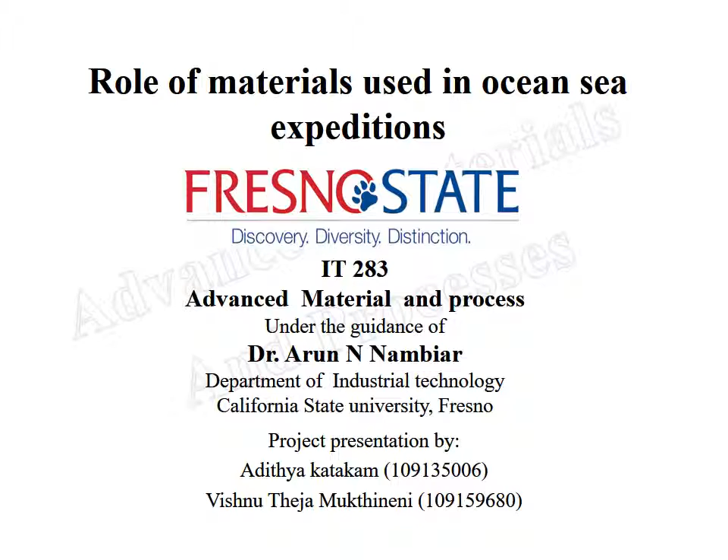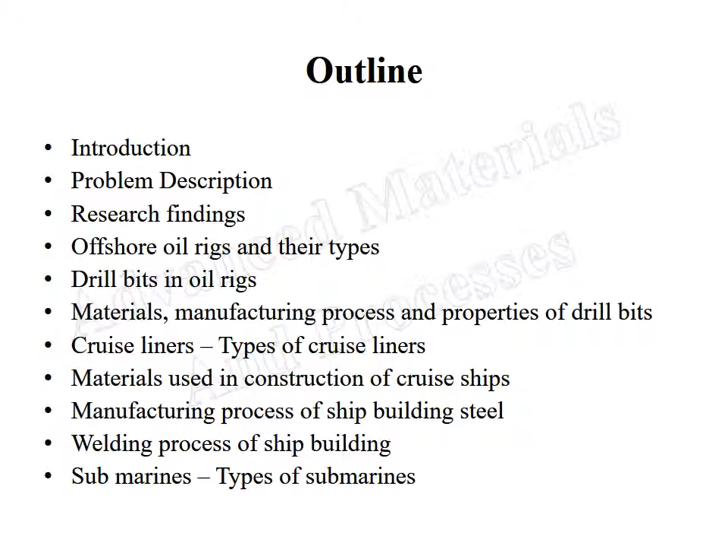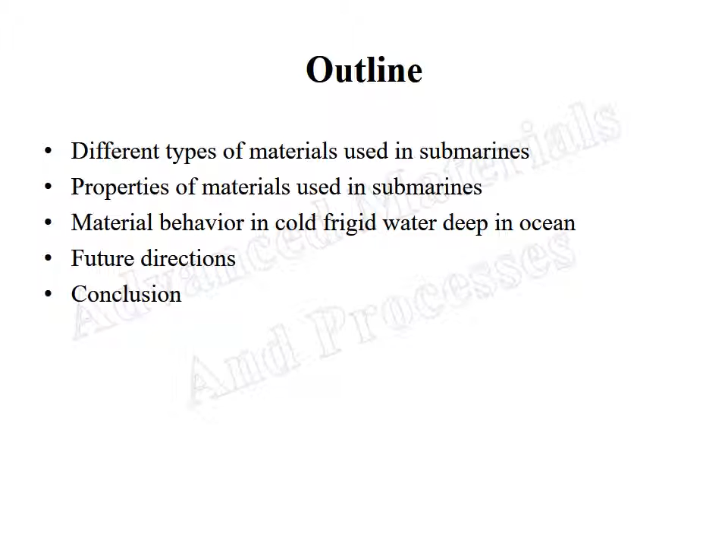This is the outline for our project, under the guidance of Dr. Arun N. Nambiar. In this outline, we discussed introduction, problem description, research findings, offshore oil rigs and their types, drill bits in oil rigs, materials, manufacturing process and properties of drill bits, and the later stages will be discussed by my groupmate Vishnu Theja Mukthineni. We also cover future directions and conclusions about what materials would be used to get the proper yield from ocean sea expeditions.

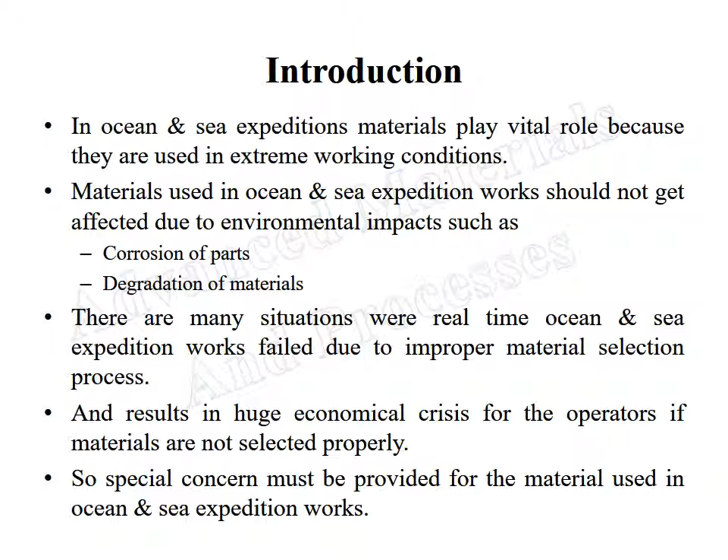Introduction. In ocean sea expeditions, materials play a vital role because they are supposed to work in extreme working conditions. So materials used in ocean sea expeditions should not get affected due to environmental impacts such as corrosion of parts and degradation of materials. There are many situations where real-time ocean and sea expedition works fail due to improper material selection process, and because of this, many operators of oil rigs have faced huge economic crisis. So special concern must be provided for the material selection process in ocean sea expedition work.

Problem description. The materials used in ocean and sea expedition works are expected to work in water bodies throughout their lifetime. Therefore, the materials used to manufacture the tools and machineries of ocean sea expeditions must have unique properties such as low thermal expansion coefficient, high corrosion resistance, excellent toughness, and high working hardness. Materials without the above stated properties will lead to failure. So this trending problem in ocean sea expeditions must be addressed by using modern technological developments in the material selection process.

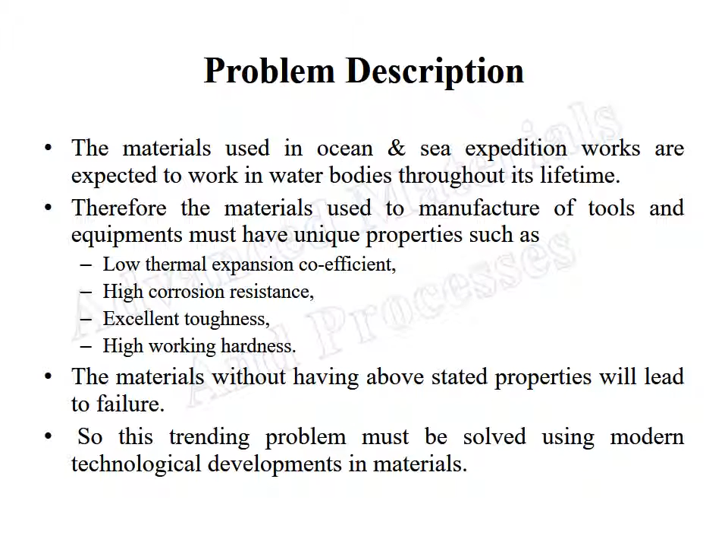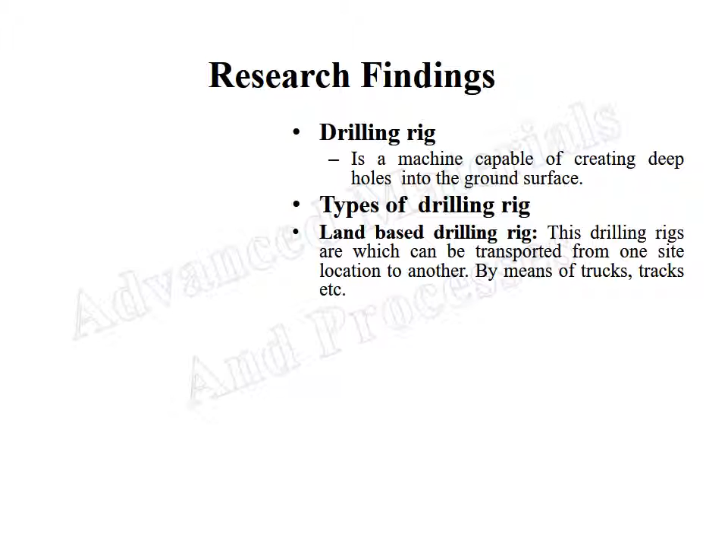Research findings. Drilling rig is a machine capable of creating deep holes in the ground surface. There are two types of drilling rigs available. One is land-based drilling rig, which can be transported from one site location to another by means of trucks, tracks, etc.

The other one is marine-based drilling rig. In these marine-based drilling rigs, there are two types available: onshore oil rig and offshore oil rig. In onshore oil rigs, these are settled on the surface of land where natural oil deposits are available, and the oil is extracted using a sucker rod pump mechanism. Whereas in offshore oil rig, they are settled on the surface of ocean and sea floor. As our topic is related to materials used in ocean sea expeditions, we are more focused on offshore oil rigs.

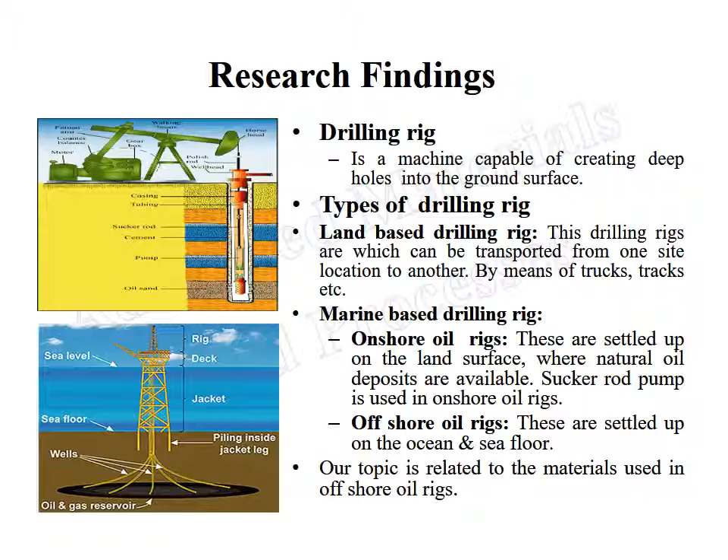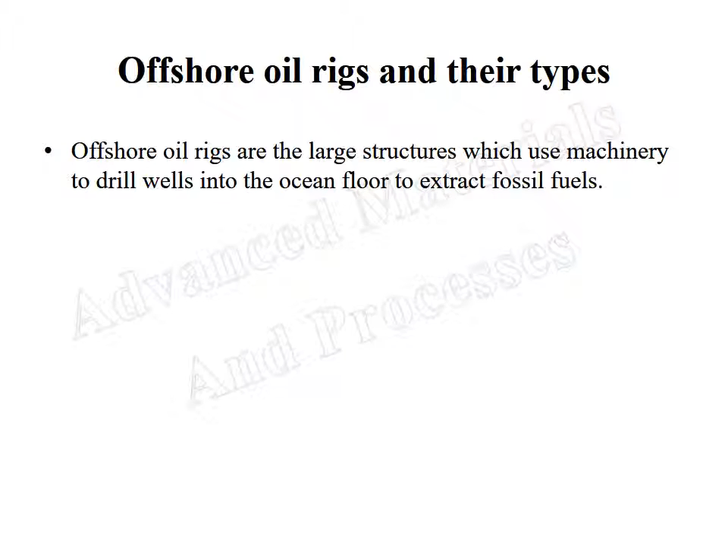Offshore oil rigs and their types. Here we discuss different types of offshore oil rigs available and the materials used for manufacturing them. The offshore oil rigs are large structures which use machinery to drill wells into the ocean sea floor to extract fossil fuels from the ocean seabed.

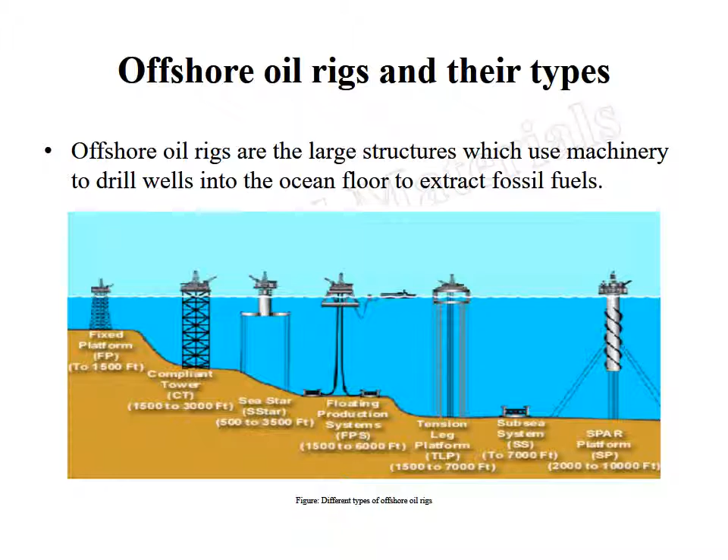Offshore oil rigs and their types. There are different types of offshore oil rigs available. The first one is fixed platform. This platform is operated at depths of up to 1500 feet. Materials such as steel bars and concrete are used to construct fixed platform offshore oil rigs. The base of the offshore oil rig is fixed to the ground using steel frames, making it so rigid that it will not get affected by winds and tides.

The next form of offshore oil rig is compliant towers. This oil rig is used when the ocean depth is 1500 to 3000 feet. This platform is similar to the construction of fixed platform but has a more improved structural design with narrow frame construction.

The next one is sea star platform. This operates at ocean depths of 500 to 3500 feet. The structural design of this platform is different, having tension legs made out of steel ropes to support the platform, with grounding made using anchors.

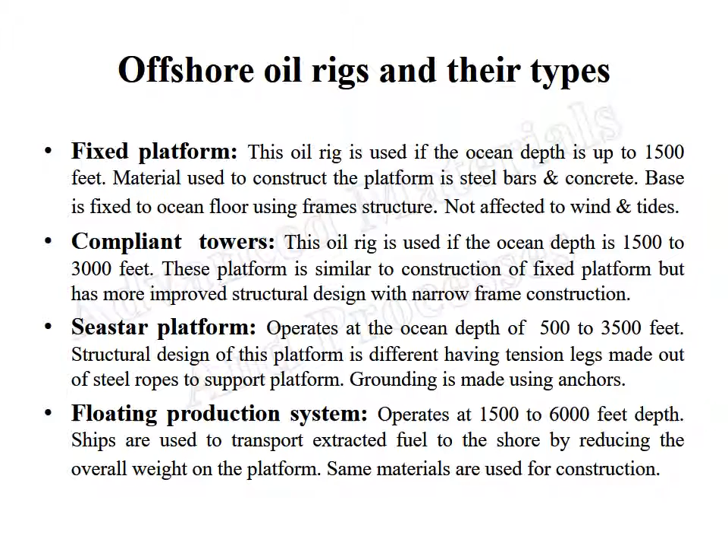Floating production system. This operates at depths of 1500 to 6000 feet. Ships are used to transport extracted fuels to the shore, reducing the overall weight on the platform. The same materials are used for the construction of this oil rig. Offshore oil rig and the types, continued.

Tension leg platforms operate at depths of 1500 to 7000 feet. Long flexible tension ropes are used to attach the platform to the ocean floor. These ropes are made using duplex steel, which has better corrosion resistance and crack resistance.

The other offshore oil rig is the subsea system, which operates at a range of 7000 feet. This system is completely set up on the ocean bed. It can only extract oil from the ocean bed but doesn't have the ability to drill holes; it is programmed only to extract the fuel.

Spar platforms have the highest operating range of 2000 to 10,000 feet. A large cylindrical structure is made to support the platform, and cables and chains are used for fastening purposes.

From our sources we found that Perdido is the largest oil rig in the world, and it was constructed according to the spar platform structure. All these platforms are resistant to hurricanes and ocean floor movements due to improvements in materials used. Platform materials must have the capability to withstand large weight and resist the impacts of tides.

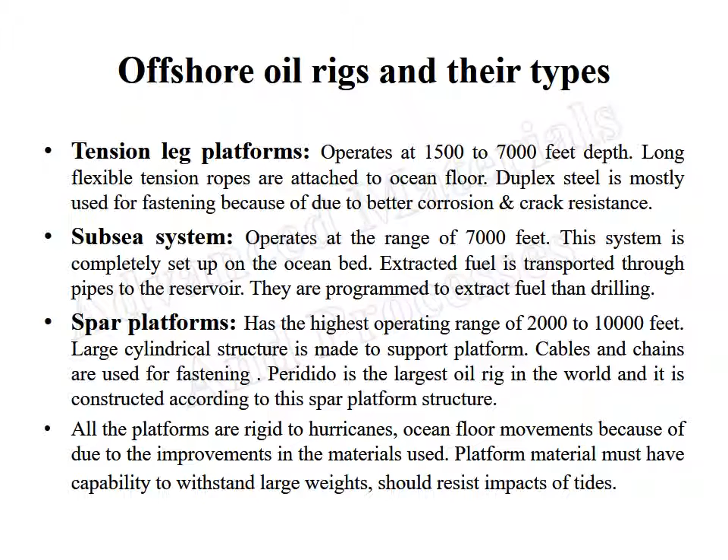Drill bits in oil rigs: there are three types of drill bits available. This figure shows the three types. The first is roller cutter bits, which is divided into two types. These can crush rocks very efficiently without any wear on the tool.

One form of roller cutter bits is steel insert bits, which are used for soft excavation works and have great penetration. The other is carbide insert bits, used for hard surfaces, and they have small protrusions on them.

The other drill bit is long tooth milled bits. They are very efficient at drilling operations due to their long teeth shape and can work in chalk and cemented sands.

Fixed cutter bits use polycrystalline diamond compact cutters to shear rock with a continuous scraping motion. These bits are about 1/8 inch thick and about half to 1 inch in diameter. Diamond is also used as a bit material along with thermally stable polycrystalline material.

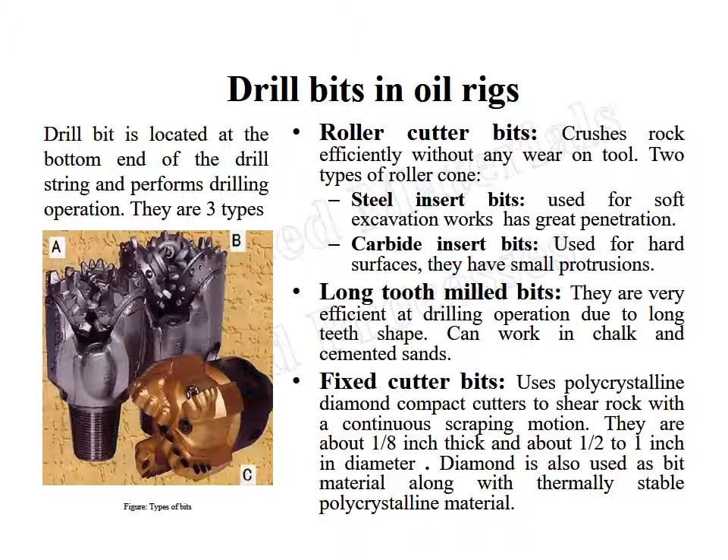We also discussed materials, manufacturing process, and properties of drill bits. Diamond is the hardest material known to man. In these bits, diamond grains are embedded into tungsten carbide blades.

The diamond used is selected according to industry specified grades. The diamond used for drill bits is 10 times harder than steel, 10 times more resistant than tungsten carbide, and 20 times stronger than granite.

To explain the manufacturing process of diamond: raw materials like graphite and cobalt are stacked in small cans and pressed to 2 million psi, followed by heating to 2732 degrees Fahrenheit for 5 minutes. This heating process creates small crystals of synthetic diamond that bond together to become polycrystalline diamond compact, also known as PDC compact structures.

The properties of synthetic diamonds are also discussed. Diamonds have high thermal conductivity, which helps flow heat from the tool to other parts of the tool. Another property is low thermal expansion coefficient. Because of this low thermal expansion coefficient, the tool will not deform and stays in its proper form.

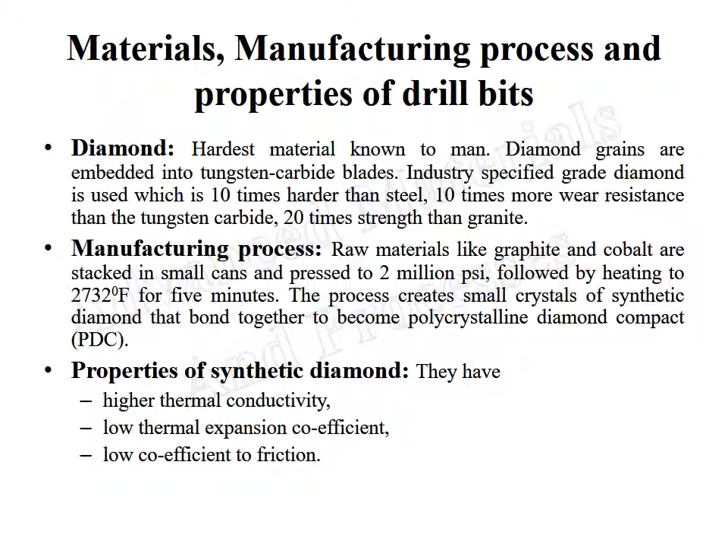Another property is low coefficient of friction. The diamond has a good coefficient of friction, so the parts on the tool will not get worn out during operation. We also discussed the manufacturing process and properties of tungsten carbide.

Tungsten carbide is the hardest material close to diamond. It's a kind of steel comprised of tungsten carbide and cobalt, where cobalt is used as a binder and improves shock resistance. It has a tensile strength of 100,000 to 500,000 psi and Brinell hardness of 2570.

In tungsten carbide tools, they are stronger and have longer life compared to other hardened steels. We also discussed the manufacturing process of tungsten carbide. This material generally starts as powder, and a small amount of wax is added to the mix of powder. The wax holds the material together so that it can be molded.

The mix is then placed in a dewaxing furnace overnight. When removed from the furnace, it appears like chalk in solid form. As a result, the output material obtained has high strength, toughness, and high hardness.

We also discussed the properties of tungsten carbide. The properties include high compressive strength. Because of this high compressive strength, the tools will not break during operation.

The tungsten carbide has a higher melting point which helps to operate the tool at very high temperatures so that the tool will not get deformed due to temperature impacts. The other form of property is high modulus of elasticity.

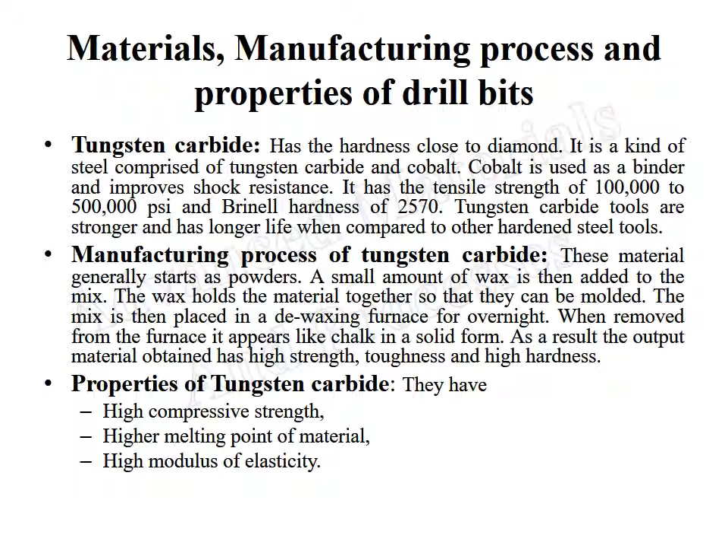Cruise liners. Cruise ships are passenger ships used in pleasure trips and vacations that are usually large and can accommodate thousands of people on board, depending upon the size of the ship. Most ships have small rooms, so many may not want to spend more time in there as the rooms are less expensive than others. The rooms which have extra space are more expensive and have more facilities in it.

It is clear that on a voyage a ship needs many types of materials and different components. Moreover, at the time of ship construction, it may need different types of metal alloys and different techniques in the construction.

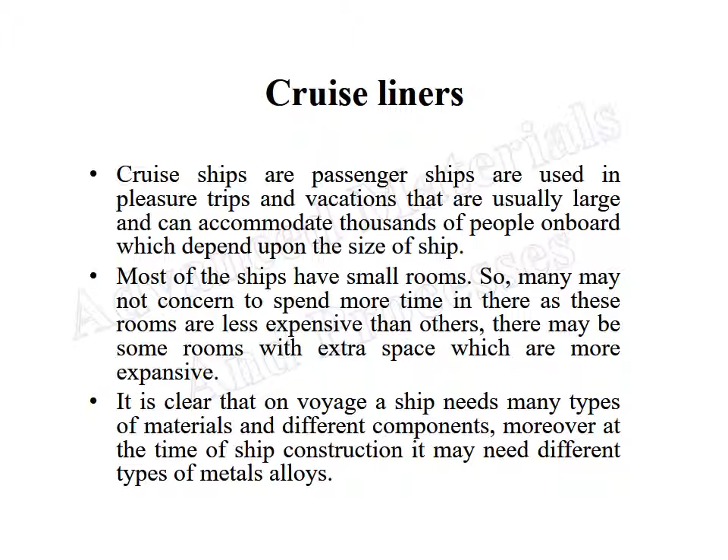Types of cruise ships: Mainstream cruise ships. These types of ships are quite common as they are marketed to fulfill the needs of the majority of passengers with maximum resort features.

Mega cruise ships. These ships can carry about 4,000 to 5,000 persons on board, and they are larger and sophisticated with maximum facilities.

Ocean cruise liners. These are constructed in such a way as to withstand harsh ocean conditions while on long voyages. They have high standards of construction.

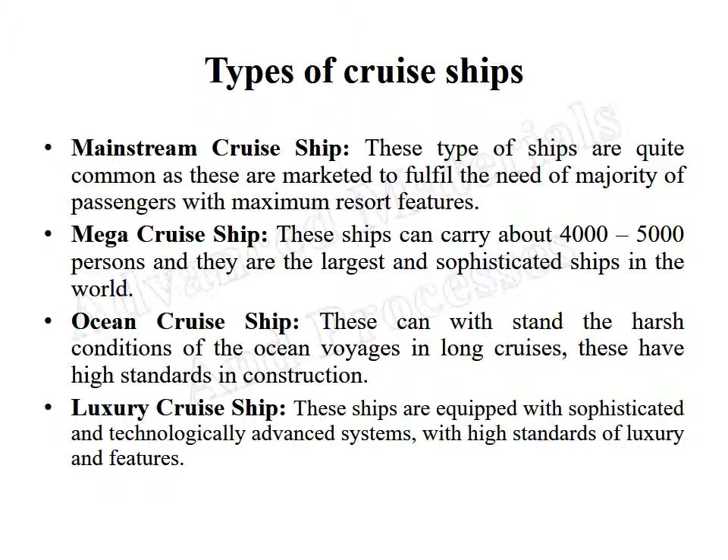Luxury cruise liners. These ships are equipped with sophisticated and technologically advanced systems and with high standards of luxury and features.

Small cruise ships. These ships carry a few hundred people on board, offering a more intimate and relaxing experience in a short voyage. Adventure cruise ships.

These are used for individual visits to remote places. They are equipped with advanced technology and several service arrangements required for the voyage.

Expedition cruise ships. These are ships used in expeditions in search of research findings in critical harsh conditions which are remote destinations. These are also called icebreaker vessels.

River cruise ships. These can't carry more than a few hundred people. These are designed to navigate rivers and inland waterways.

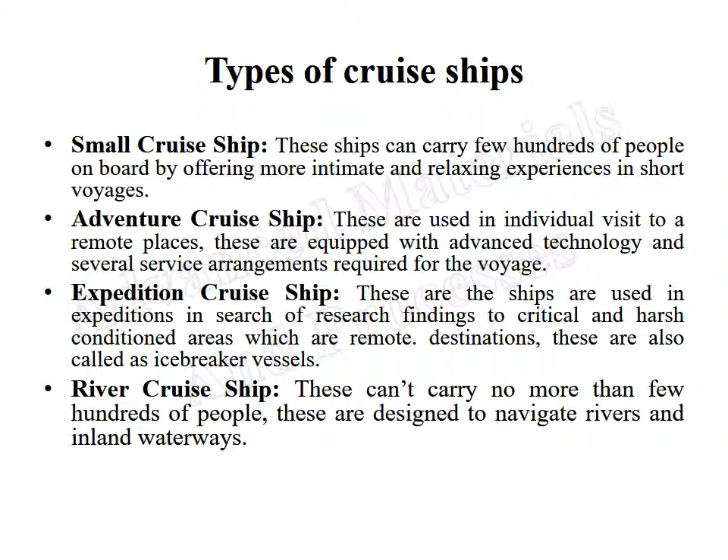Materials used in construction of cruise ships. The materials used in construction of ships should have properties of toughness, ductility, malleability, and corrosion resistance, which are essential for sea voyages.

The most important material of all is steel, which should be heavy metal sheets and plates with a good combination of different properties of alloys. The steel used in construction undergoes different thermal treatments which reduce the alloying materials and give strength.

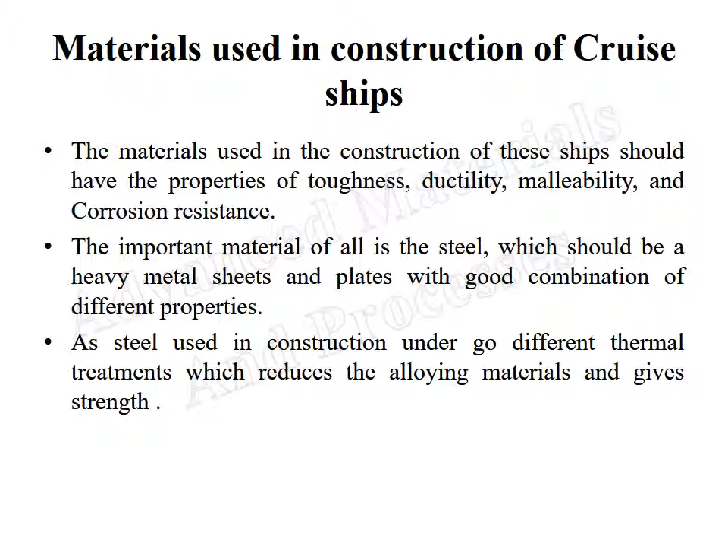Paint is one of the most essential work that is to be done after the construction of the ship. It consists of three components: pigment, a vehicle, and a solvent, depending upon the paint that is used.

It helps steel avoid getting corroded from seawater for a long time, and also helps in reducing friction from water while sailing.

A ship is a large structure and cannot be painted frequently, so a spray system is used in order to paint the whole part in multiple layers of painting.

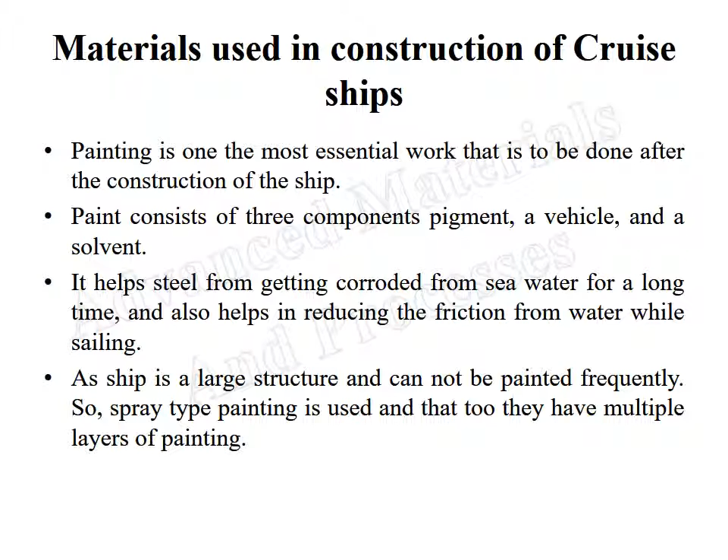Manufacturing process of shipbuilding steel. The first step of the process is melting the raw materials, followed by the forming process where steel is molded into the desired shape, and then heat treatment.

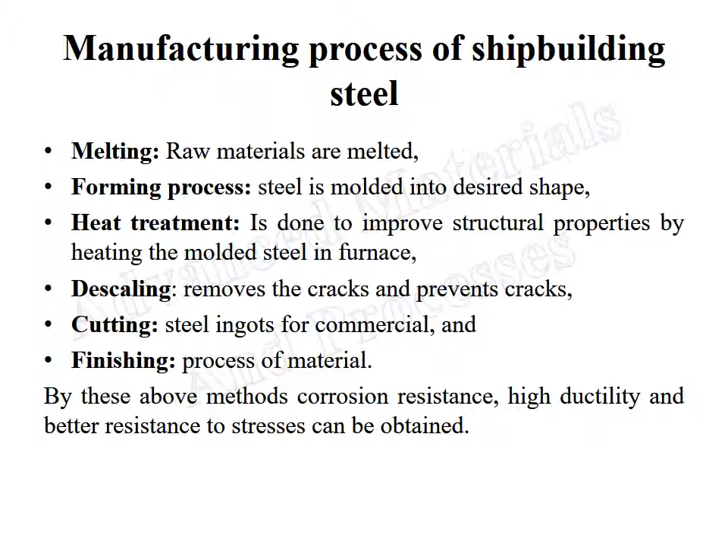This is done to improve structural properties by heating and molding steel in a furnace. Later comes descaling, removing cracks and preventing cracks, then cutting steel ingots for commercial use, and finally the finishing process of the material. By this method, corrosion resistance, high ductility, and better resistance to stress can be obtained.

Welding process in shipbuilding. Welding is the most important process in shipbuilding, as every part is welded using sealing materials to attach at high temperatures.

There are different types of welding techniques used in different parts. Some of the techniques are gas metal arc welding, which uses compressed silicon with copper alloy as a sealing agent. Low carbon steel and aluminum welding is done by lap joint and laser technology.

Submerged arc welding, followed by shielded metal arc welding and gas tungsten welding. These types of welding are used at different parts of the construction in order to join heavy sheets and small instruments to the ship's mainframe.

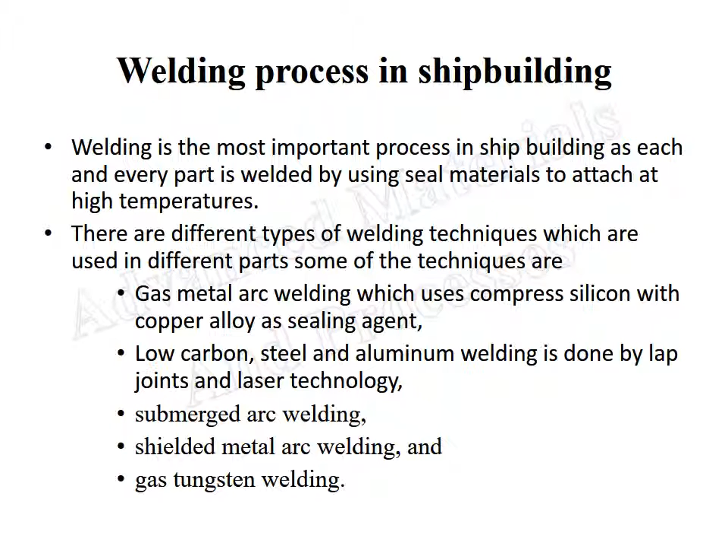Submarines are used mostly by armed forces in defense fields. They are built to travel and to stay a long time underwater.

It is made up of high resistance material in the construction of the body to withstand greater pressures and impacts when underwater. The outer surface of this submarine is known as hull. It has to withstand greater depths of 1140 feet, so it is made up of high strength alloyed steels. Most submarines will have two different hulls in order to withstand any accidents.

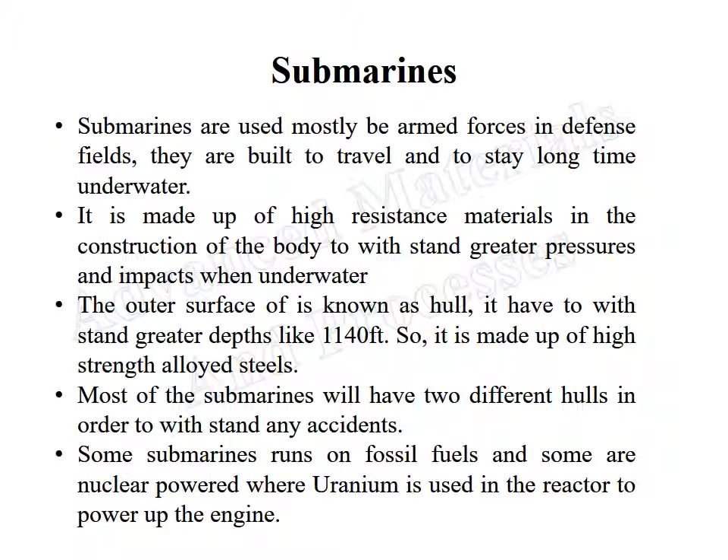Some submarines run on fossil fuels, and the submarines which stay longer in their missions use nuclear power, where uranium is used in the reactor to power up the engines.

Types of submarines: pleasure submarines. These are used for the pleasure purpose. They won't go to the deeper depths of the sea. They're just used for the admiration of marine life, and they are small and too expensive.

Military submarines. These are used in naval wars and upholding nuclear weapons. Most of the largest and expensive submarines are used in the military all over the world.

Scientific submarines. There may be different sizes of scientific submarines. Among them, submarines are mostly used for expeditions and research purposes. This helps in investigating the bottom of the ocean and can help bring back biological samples.

These submarines are made up of syntactic foam, a composite material with hollow microspheres implanted in large structures. These help in maintaining the pressure without getting crushed.

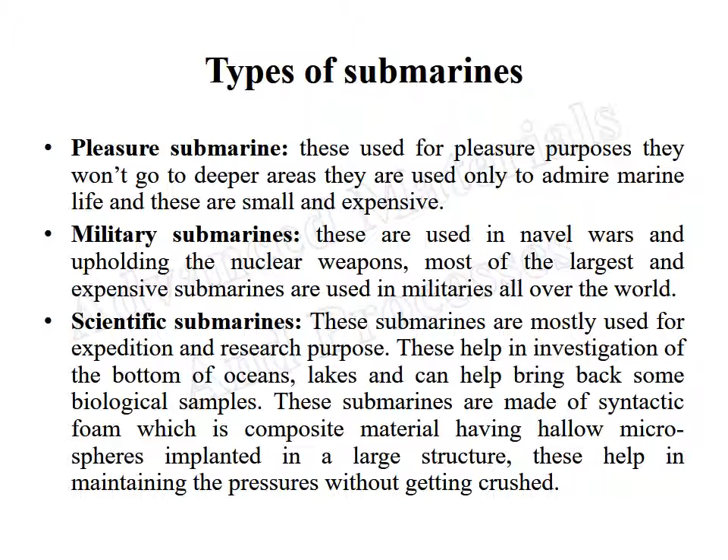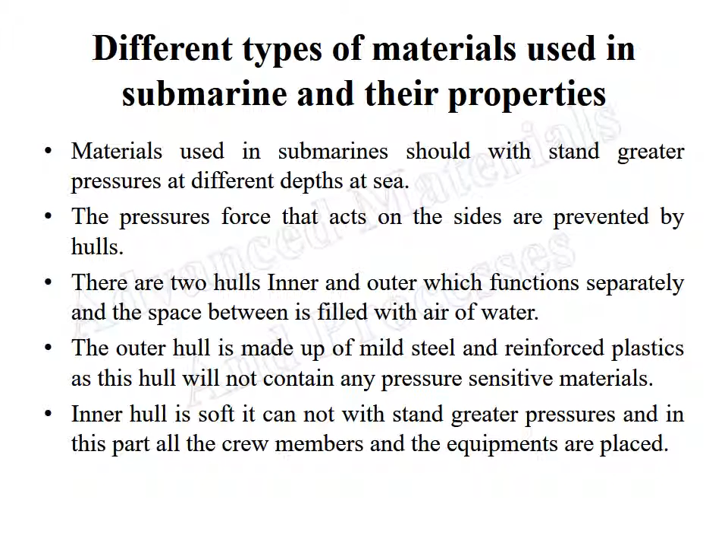Properties of materials used in submarines. The materials used in the construction of submarines should have the following properties. The first thing is they have to withstand high amounts of underwater pressures when the submarine travels at a lower depth.

The ability of the metal to be bent into one thick sheet to make it as a hull. The material should be lightweight, which helps in fast moving and effective travel underwater. They should be non-magnetic for stealth, avoiding a magnetic signature that can be tracked.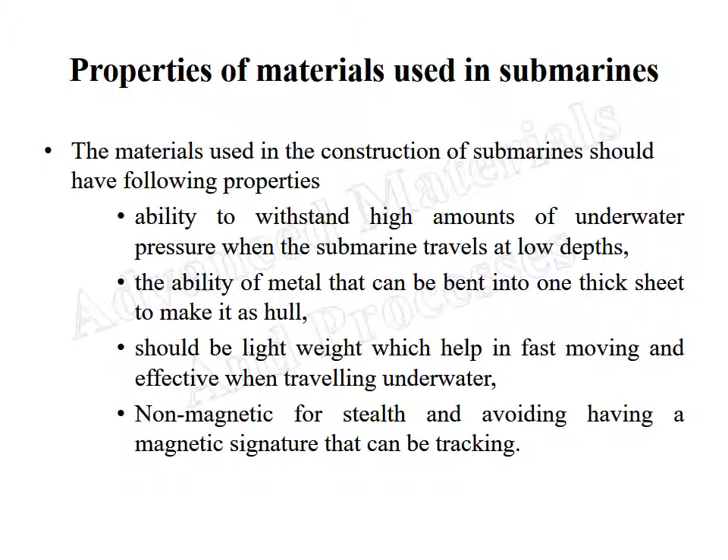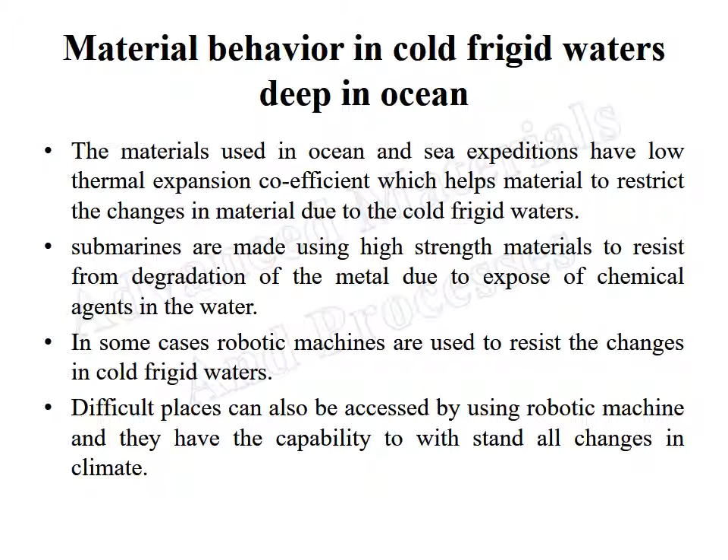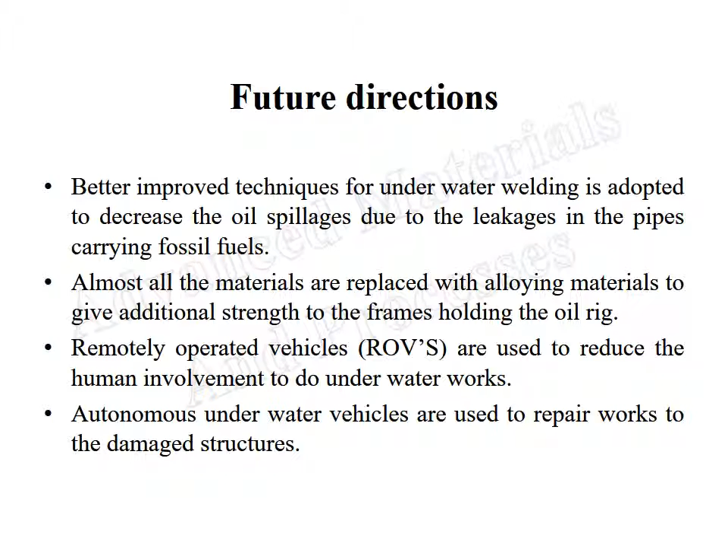Followed by remotely operated vehicles like ROVs, used to reduce human involvement in underwater work. Autonomous underwater vehicles are used for repair work and damaged structures.

Conclusion. Improvements in materials will increase the efficiency of oil rigs and other materials used in construction of cruise ships, submarines, and many other vessels.

Materials used in oil rigs must withstand high temperature resistance properties, such as low thermal expansion coefficients. Strength tests must be made before using the material in the frame of oil rigs, such as universal testing machine, which is used to determine the material strengths.

If materials having defects are used in the construction of ocean and sea expedition missions, they will cause further losses to the operation. So special concern must be made in order to overcome these problems while selecting materials which have better properties.